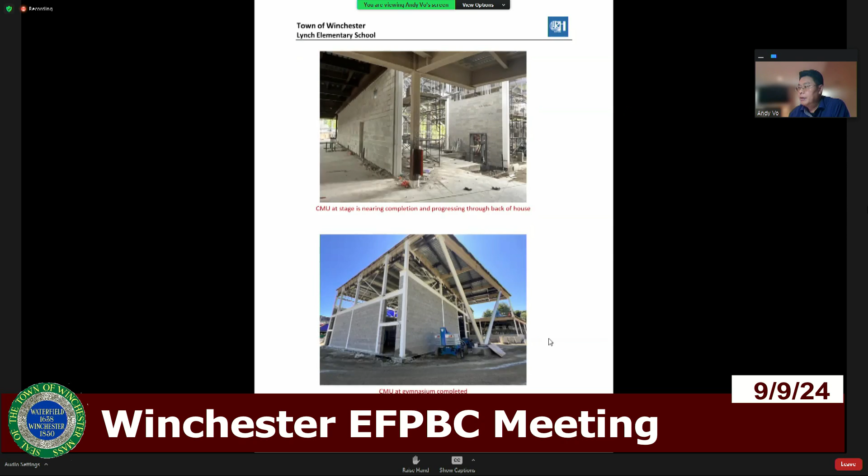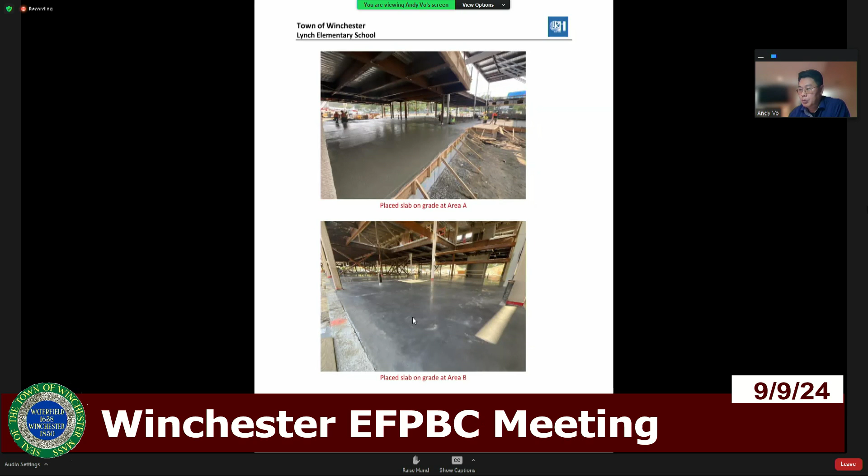So this is the slab on grade at area A that happened in August. This is the pour that happened. Also in area B, another pour that happened already, and it's completed.

Exterior framing, as you can see here, is still continuing on the second floor in area C, working clockwise around the building as mentioned.

So they're doing rough electrical on the 3rd floor here in this picture, and you can also see all those hangers that have already started happening on the 3rd floor down.

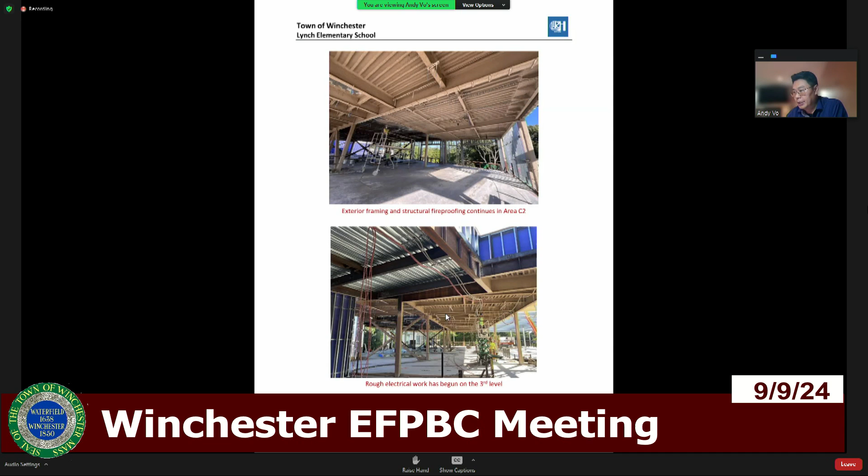We started the ductwork in August on the 3rd floor, heading to the 2nd floor soon. We're also getting prefabricated plumbing assemblies for the bathroom areas, which are being delivered to the 2nd floor.

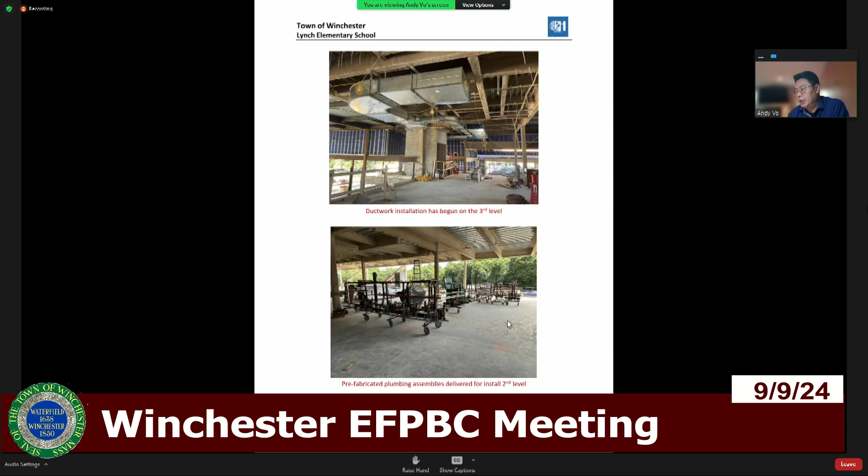Here's a picture of the progress from the south looking into the north. On the upper floor, we've already started sheathing and exterior framing. From the north side looking south, where the gym area is, the upper floor sheathing is done on area B. As mentioned, we're working clockwise, so it's going to continue to area C and around the perimeter.

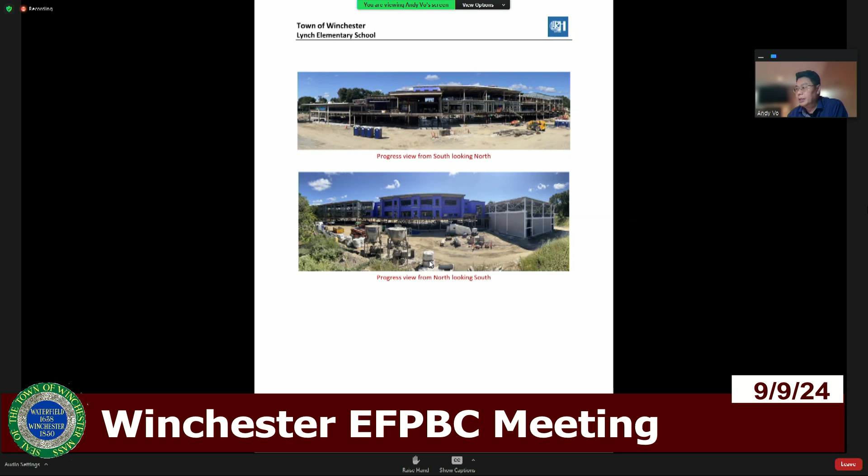Financially, we're still right on budget. As of right now, we still have a remaining $6.6 million total contingency.

For schedule, we included the latest baseline schedule from July. I won't go into every detail, but as mentioned, we're still on target. We're still targeting June 26th for substantial completion. Right now we're targeting final inspection at the end of May, beginning of June, and substantial completion for June 26th, with furniture delivered toward the end of June.

We'll get the furniture installed and finished in July 2025. As mentioned earlier, we're targeting teacher move-in for August 2025, for school opening in fall of 2025.

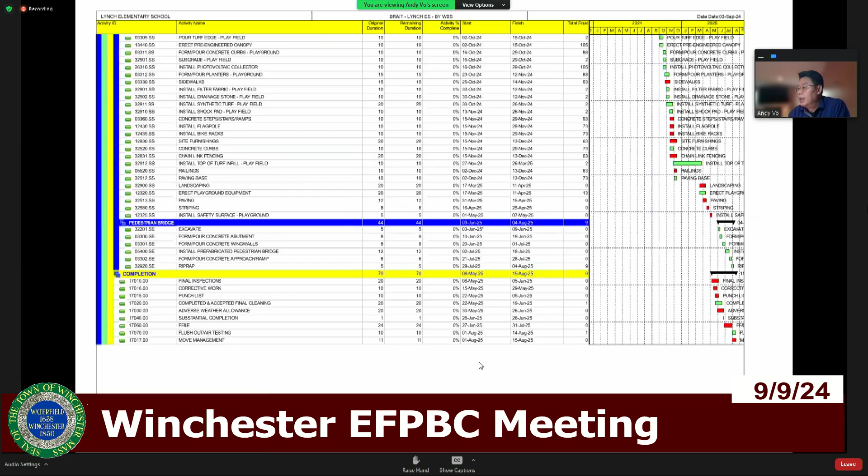We included our weekly report. As mentioned earlier, our manpower in August was between 50 to 70. We have more progress pictures if you'd like to review those, available on the Google Drive.

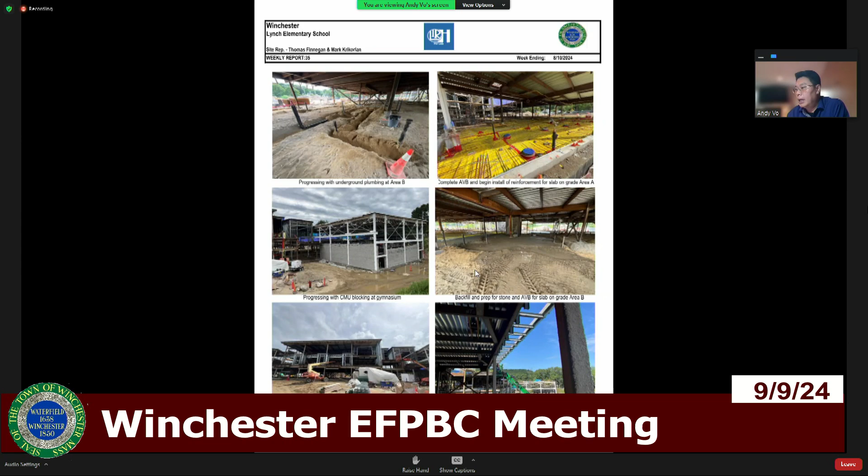As of today, because we started the MEP work in September, our manpower this week and last week has been around 100. That has increased tremendously, and it's going to continue for the next 6 months.

There are more progress photos if you want to see the detail, and we also have our submittal and RFI log at the end just to show the progress.

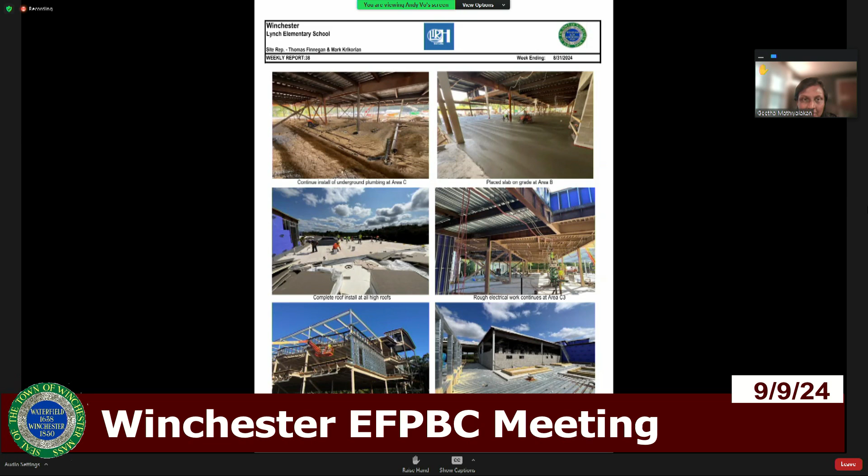The other question - we mentioned the pedestrian bridge. Where do we stand on the Chapter 91 permitting? Do we have any update after the permit application was submitted? Any concern about ordering the bridge without knowing where we stand on the permitting?

I haven't heard anything about the status of the Chapter 91 permit. We typically don't hear anything from them. No correspondence, nothing at all after submitting. Nothing.

You mentioned the binder course is taking place, so I'm wondering how that relates. Binder course is for the site, it's not the bridge. I mean, the site work is linking to the pedestrian bridge, I guess, right? Would you look at it that way too?

Chapter 91 license is only for the bridge, for the waterway. I'm just saying there could be overlapping areas with the bridge work. No, the binder course is just for the site only, it's not near the bridge. So we're still waiting for that Chapter 91 permitting. I can try to check in with them, but it's usually not productive - I've never had great success. They'll just tell me it's still pending.

All right, I guess a good picture. So like Jay said, it would be nice to visit the site to see the slab on grade. I was just thinking of on Monday maybe, but that's all.

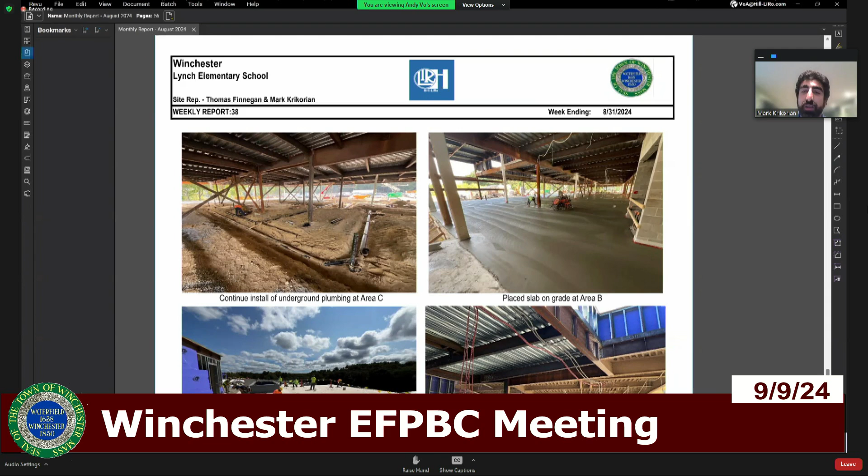Andy, you want to answer that first? Sorry, I can chime in there. Go ahead, Mark. The ducts are actually being shipped sealed already, and they're leaving those seals on and removing them as they mate the surfaces together. So the exposed ends are staying covered.

Thanks. Yep. So I have some good news on the transformer. I reached out to a friend. Our transformer has been put aside for us. It's in the Somerville yard, down on Linwood Street in Somerville. And as soon as we can get the pad poured and set and inspected by Eversource, I can coordinate the delivery of the transformer.

Which I would suggest as soon as possible so it doesn't disappear and go to another project. So, Brendan, are you saying all they need done is the pad poured? Well, we'd want the primary and secondary conduits obviously leaving the pad, but once the pad is poured, I feel pretty confident I can coerce them into getting that thing delivered and set on the pad, which would be great.

Okay. Well, I've reached out to Brait. We'll see what they can do with their schedule, but November's been pretty much the date that they've always had for when they would be ready to receive it. The good news is we have one set aside for us for this project.

Great. So as of last week, they mentioned that once they pour that last piece of the slab on grade, they will pour the transformer pad. So I'm targeting next Monday when they start pouring, Monday, Tuesday. They will probably pour that transformer pad next week.

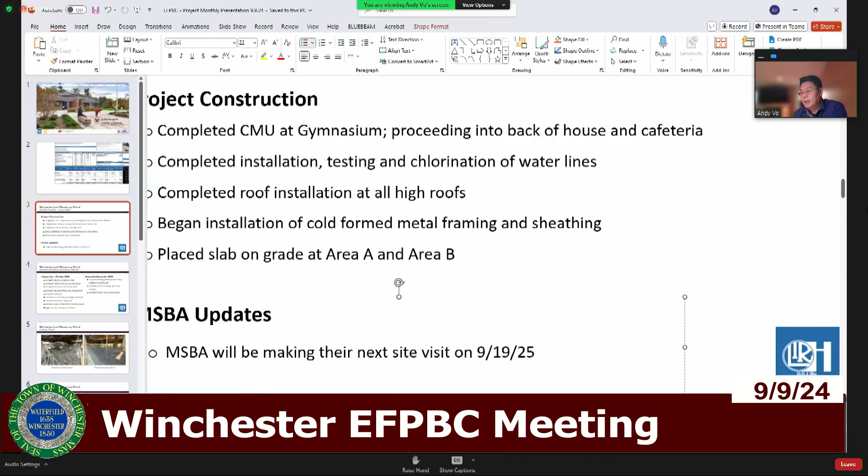For September, October work: try to finish the slab on grade, continue with exterior framing and sheathing, and then work on the exterior envelope, like metal panels and brickwork. That's going to happen starting probably in October.

We're targeting to finish steel detailing this month, along with fireproofing, and then we'll start the staircase work once we're done with the slab on grade. We will begin the brickwork probably toward the end of this month.

The brick builder is getting ready for temporary heating for the masonry, trying to keep the temperature at 50 degrees. We've already started planning for that temporary heating.

We will continue with MEP roughing, starting from the upper floor down, and then prep for the binder paving before getting that poured before the winter.

For November, December work, we will try to finish the building envelope, including the brickwork and some of the metal panel work, but that's probably going to continue into the winter. As mentioned, the curtain wall window is not going to be delivered until December 20th, so we'll be working on that in the winter.

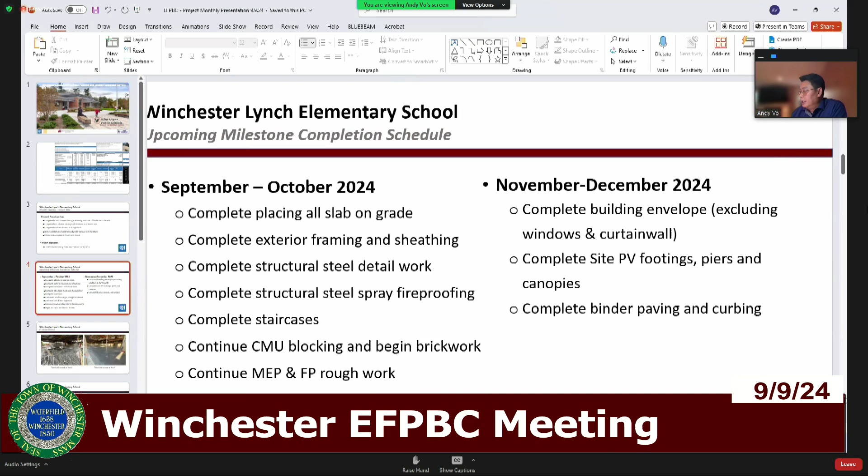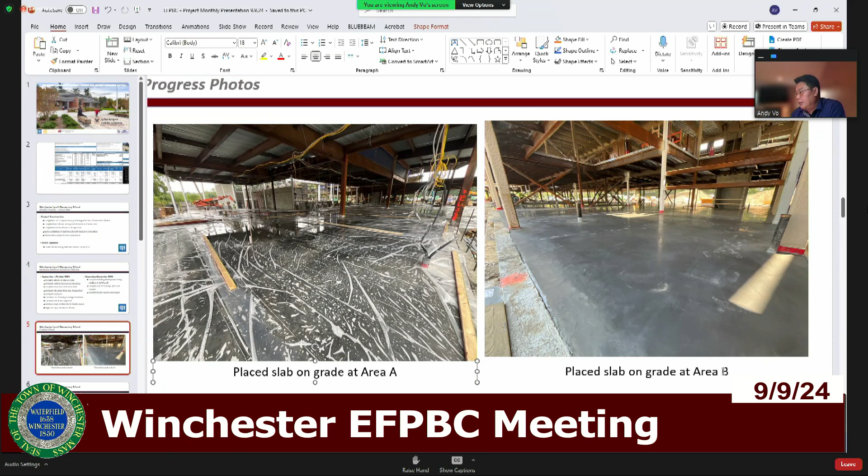This is a picture of the slab on grade at Area A, this is the wet area here. Slab on grade at Area B is completed, both areas. Another picture of the CMU at the gym, and another picture of the high roof that's completed.

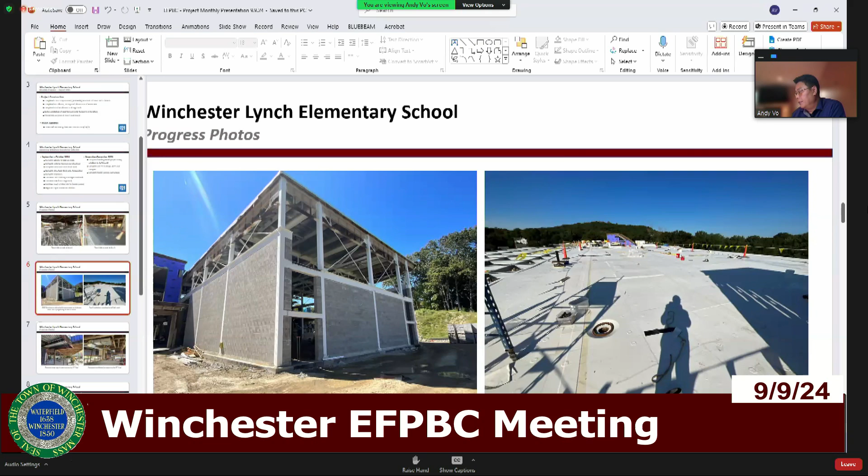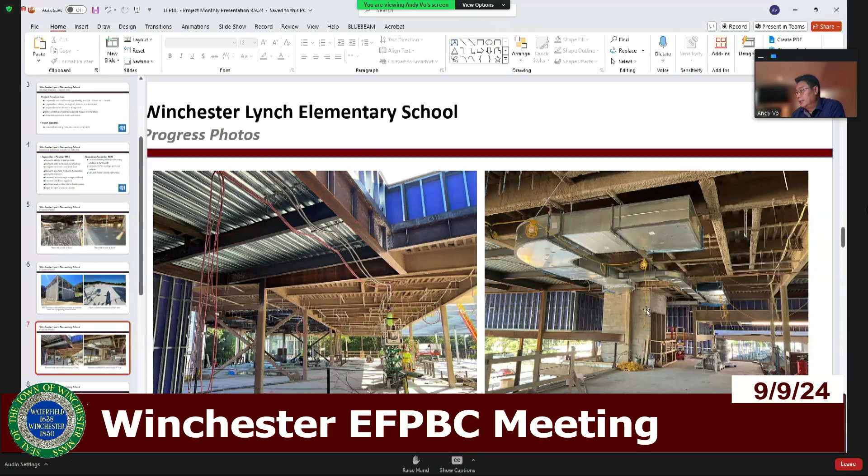Again, this is the picture of the rough electrical work and the ductwork on the upper floor, second and third floor.

Another picture from the south side looking at the north side. As you can see, the exterior framing and sheathing on the upper floor. Another picture from the gym area looking north, I mean from the north looking south. Sheathing is complete here at Area B, upper floor.

I want to share a time lapse.

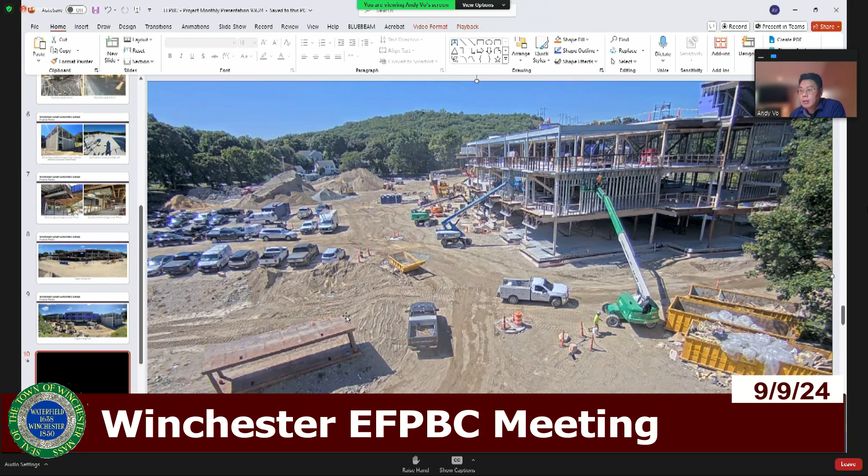I think that's about it for our presentation.

Chris asked: Andy, what's the plan for the protection of the footings and slab that are not below frost depth for the winter months? I guess you were talking about November, December. Just thought I'd ask.

Ask your question again, Geeta. What's the plan for protection of the footings and slab during the winter months that are not below the frost depth? Because you were talking about November, December, I thought I'd ask about winter protection.

Shouldn't be any issue. They already backfill the footings. This is the slab on grade. The interior footings are not below the frost depth, but the exterior ones are below 4 feet and already backfilled. The building won't be heated, right?

I'm not sure of your question, Chris Sharkey. About 10 feet. Yeah, if they need, they'll temp heat it, so that should help. There's slab on grade, so that'll protect it, and then they'll have temp heat as they need to.

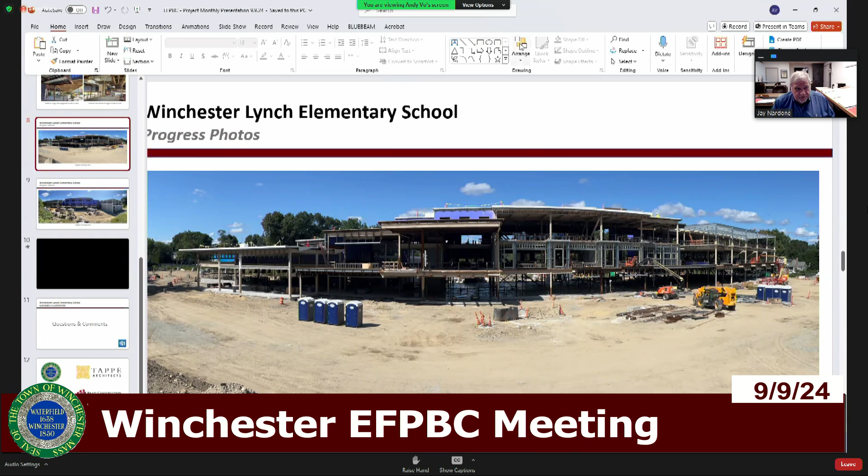Okay, so we're just looking for approval on all the payment authorizations for the Lynch Elementary School project, and then the one payment authorization for the high school for SGH. You can see the totals in front of you. You have all the backup. Looking for a motion.

Meg, that SGH payment was for their time and services over the summer with all the mock-up testing, right? Correct. They're going to further talk about scope of services to date. Yeah, we'll talk about it in just a moment.

I'm happy to make a motion, Jay, to approve the payment authorizations as presented in the manager's letter dated September 9th for the Lynch Elementary School, and the payment authorization for Winchester High School to Simpson, Gumpertz, and Heger as presented. I'll second that.

Roll call. Frank? Aye. Lisa? Yes. Todd? Aye. Geetha? Sorry, I said aye. Mark? Colleen? Aye. Richard? Aye. Don? Aye. And Emily? Yes.

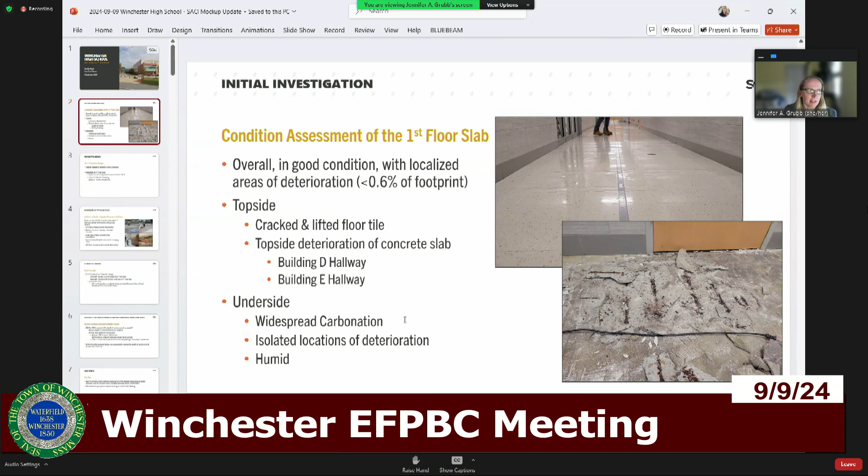In the spring, we developed 35% schematic design documents, primarily the topside repairs in the building D and E hallways, to address those lifted tile areas. And we also discussed options for the underside of the first floor slab.

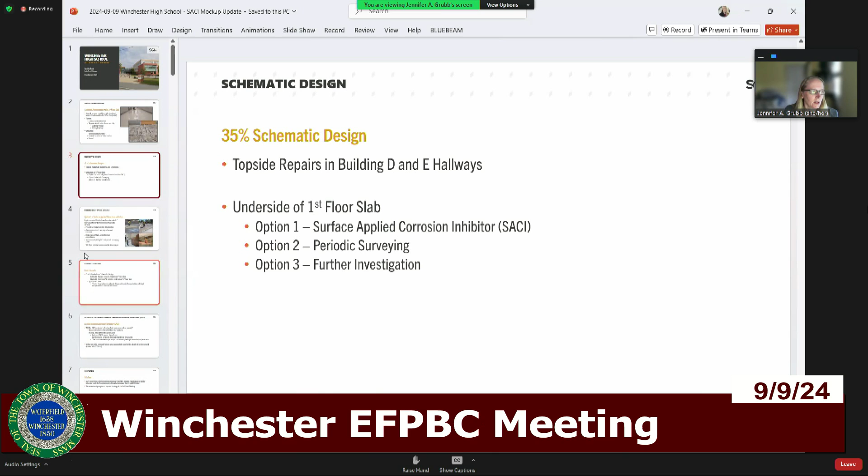The options we proposed were applying surface applied corrosion inhibitor, periodic surveying, and further investigation. From our prior discussion with this group, we moved forward with surface applied corrosion inhibitor, with the plan that this be applied to the entire underside of the first floor slab, and follow up with monitoring the performance with periodic surveys. The corrosion inhibitor can slow deterioration, and it retards corrosion in already carbonated concrete, and it can also do so in chloride contaminated concrete, and it helps reduce future concrete repair.

The downside is that because of the large footprint, it's a sizable cost, and while it will slow deterioration on the underside, it likely won't affect the topside deterioration and the lifted tile that you've been seeing.

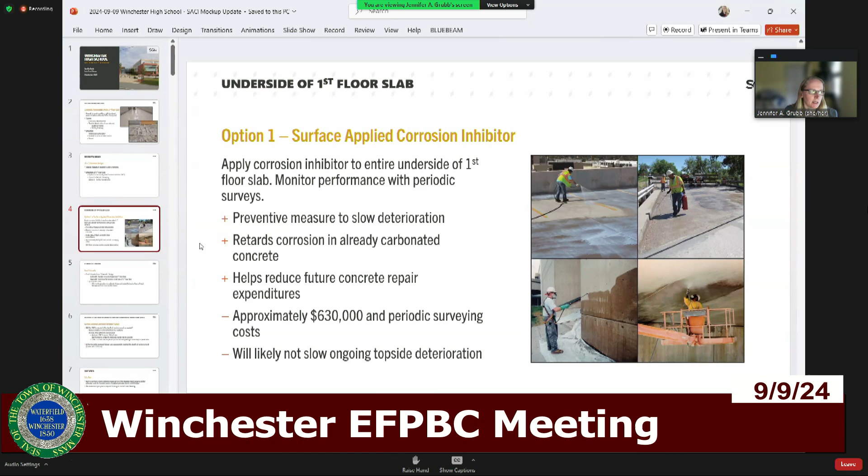We developed a cost estimate based on the schematic design, with just under 400,000 estimated for the topside repairs and 630,000 estimated for the underside of the first floor slab for applying the surface applied corrosion inhibitor. I want to note that this total of 1.02 is a construction-only estimate. It does not include engineering fees or project management or internal costs that you as Winchester may carry.

So over the summer, we looked into the surface applied corrosion inhibitor further, in particular to confirm that the products would be able to reach the depth of the reinforcing steel to provide the corrosion inhibiting protection. So we performed 2 mock-ups, each of a different SACI product, and we applied each product in approximately 100 square foot area. We waited 30 days, which is what's recommended by the manufacturers. And then we collected concrete core samples and performed laboratory testing to assess the depth of penetration.

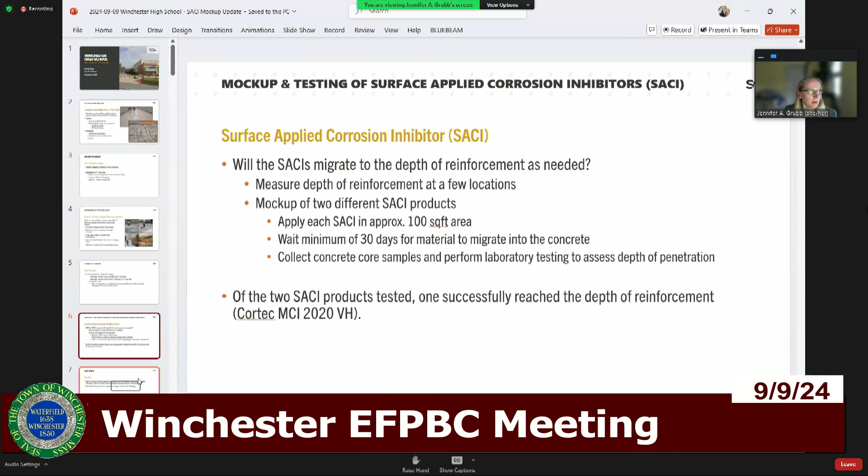So next steps, as I understand them, is that Chris and I have talked about doing a more detailed visual survey of the topside repair areas to better estimate the costs for the topside repairs.

This is our original condition assessment. We did a sounding survey, which is where we dragged a chain to listen for delamination, but we weren't able to hear the delamination as different from where the tile is debonded. And we can't do the sounding survey in carpeted areas.

So this survey would be a visual looking for lifted tile, bumps in the carpet, where the doors might be starting to get stuck from the lifted concrete.

And as Chris alluded to, we understand that you plan to request funding at the fall town meeting, and we're happy to support in whatever way we can.

And then I just have the questions that I'll want to run through that you guys had submitted to us. First, can the underside work be done separately from the topside work? The answer is yes. They're not very closely related.

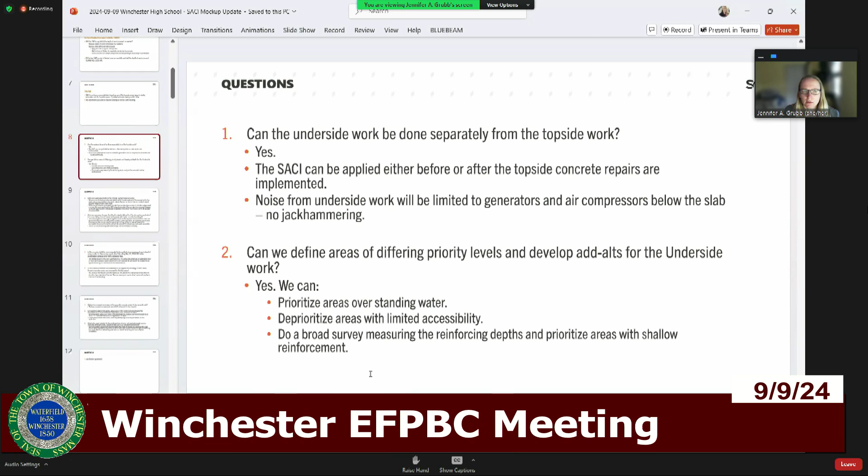Is there an applicable treatment for chloride contaminated concrete? We've been talking about corrosion inhibitors being applicable for carbonated concrete on the underside of the slab. Corrosion inhibitors can also be applied for chloride contaminated concrete. In general, we recommend robust concrete repair details for chloride contaminated concrete. The new repair material would include a corrosion inhibitor in the mix. We also include treatment of the exposed reinforcing steel to clean it and coat the steel, and it's possible to add zinc anodes to retard corrosion adjacent to the repair areas.

The corrosion inhibitor we'd recommend applying to the top side of the concrete slab where it's exposed. To borrow a phrase, applying the corrosion inhibitor throughout the entire floor is not worth it - the juice is not worth the squeeze. The cost of removal and reinstallation of all your finishes is not good bang for buck in terms of applying the surface applied corrosion inhibitor on the top side.

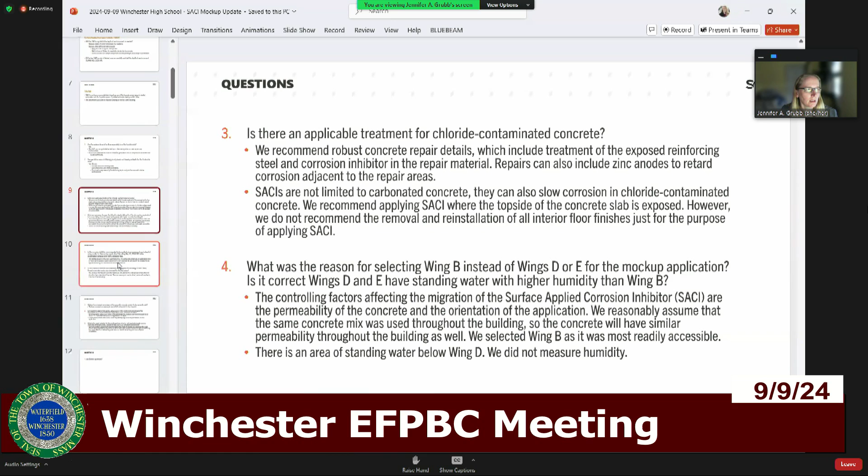Is the corrosion inhibitor recommended to be applied using a pressure hose instead of a roller, as was used for the mock-up application? In our slide presentation in May, we showed pictures where the corrosion inhibitor was being applied by spray. I'd like to note that our photos were examples only, and the Cortec MCI 2020, which worked so well, can be applied by roller or hand pump sprayer. Power equipment is not required. We will specify for the future project that the product be applied according to the manufacturer's recommendations.

Is the corrosion inhibitor recommended to be applied for wings D and E, even though concrete repairs are proposed for those two wings? The answer is yes. The repair areas in wings D and E are small compared to the entire footprint of those wings, and we see carbonation throughout the underside of those wings. So there will be areas outside of the repair areas that will still have carbonation on the underside of the slab.

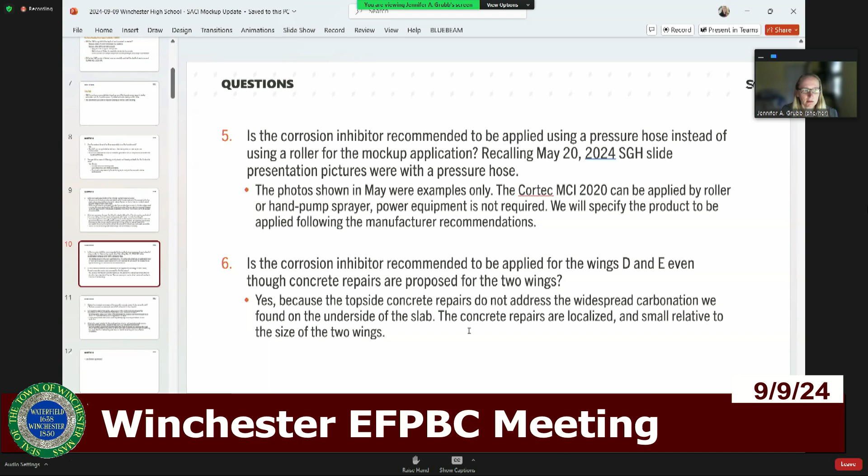Last three questions. What is the proposed percentage of area with concrete repairs for wings D and E? I can tell you the repair area is a little less than 0.6% of the total first floor footprint. I was not able to calculate the percentage just for wings D and E in time for this meeting, but if that's important information, we can calculate and provide that number.

Is it recommended to find out the actual cover of the reinforcement instead of assuming 3/4 inches before applying the corrosion inhibitor? We expected the reinforcement cover to be 3/4 inch because that was indicated in the original construction drawings. We measured the actual cover at just a few locations and found the depth to be about 1.5 inches deep. As a reminder, the Cortec 2020 migrated to 1.5 inches deep. Further measurement of the actual cover may identify large areas for prioritization of the application. But it's certainly a reasonable question about measuring before applying the inhibitor.

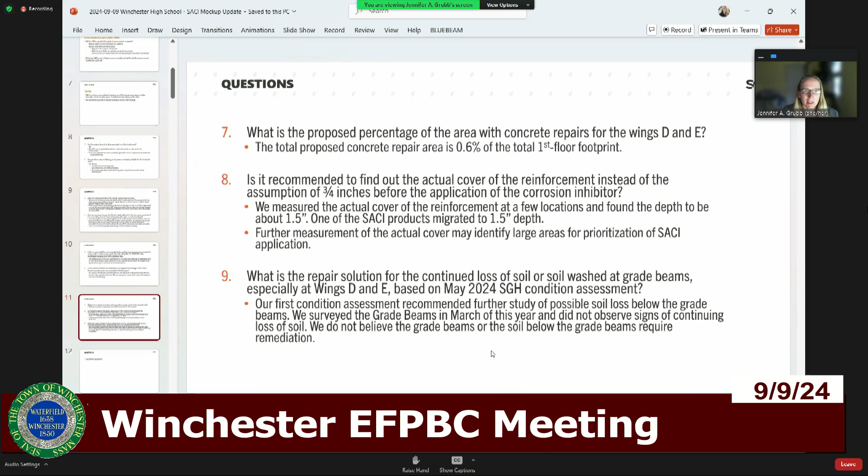Chris: I just wanted to make an overarching comment for the committee, and it can open up for questions. I know most people were here at the last meeting, but for those who weren't, I want to remind everybody that this project has drawn the attention of the Capital Planning Committee. It was ranked as the #1 priority in town in 2 rounds of ranking.

Tonight, possibly at this very moment, the chair of the Capital Planning Committee, Roger McPeak, is meeting with the select board to talk about capital project priorities. As part of that conversation, they're also discussing potentially the use of free cash on top of our building and capital stabilization fund.

We just got the numbers in from DOR. Our free cash certification came in. We have over $24 million sitting in the bank in free cash. That far exceeds our free cash policy as a percentage of operating reserves.

So the select board has been having some conversation, no commitments yet, around not only supporting some of the priorities that capital planning would typically bring forward, but possibly dipping into that capital piggy bank for some large one-time expenses.

It is virtually certain - first of all, capital has already shown support for this project, whatever it may become. The select board seems to show support for it as well.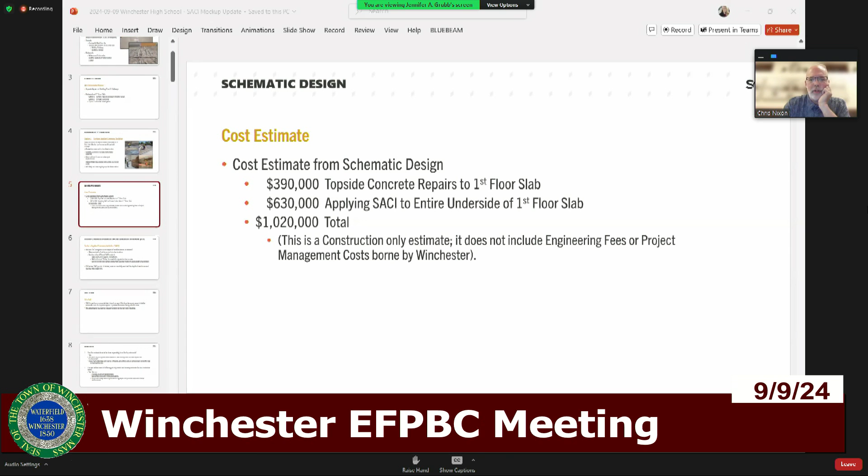So Jay, if it's okay with you, what I'd like to do—and we can certainly jump back to Jenny's report at any moment, I don't want Jenny to go away—but if it's okay, I wanted to bring up our agenda real quick, and be sure we don't lose sight of what we have to go through tonight. So I hope you guys can see this.

So SGH has made their report, I think I shared with you guys. There's strong support for this project, top project ranked by capital planning. Typically capital would be bringing forward projects, we recommend projects to management, they show up on the warrant at town meeting, and they're funded through the building or capital stabilization fund. In this case, it would be the building stabilization fund.

Jenny and her team have been asked to put together a proposal so they can help us, Meg, drill down on our comfort level around that 1.02, and whether we need to look more carefully at the topside work. We don't have that proposal yet. We've thrown a lot at Jenny and Greg, but Meg, my understanding is we have some dollars left that could fund a reasonable amount of work.

So while we do not have a proposal to vote on tonight, I know, Jay, we're not meeting again until the 23rd. I don't think it would be in our interest to wait until the 23rd to tell Jenny and her team they could come take another look at the high school.

If it's okay with you, Jay and Meg, is it okay for me to ask if there's a consensus that if this is a modest amount of fee and something, Meg, you can work with from the dollars remaining, we could authorize you to engage Jenny and her team, and deal with this formally when we come back on the 23rd in terms of an approval.